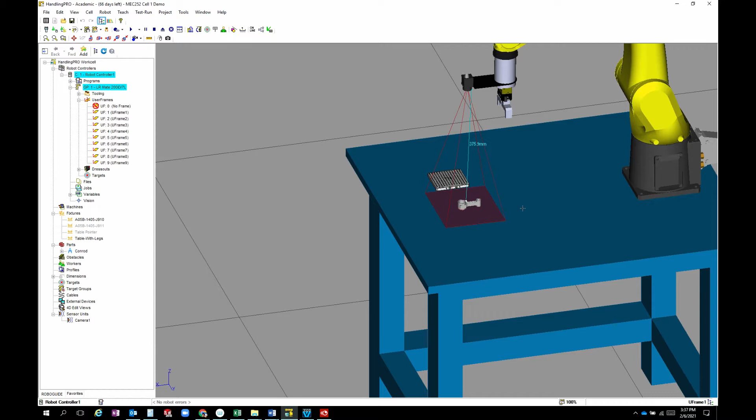As we move our robot, this field of view is also going to move because our camera is connected to the robot, so our camera moves with it. To be able to center this part inside our field of view, we have to move our robot, and thereby our camera and field of view, into a position where it is centered over our Conrod part sitting here on the table.

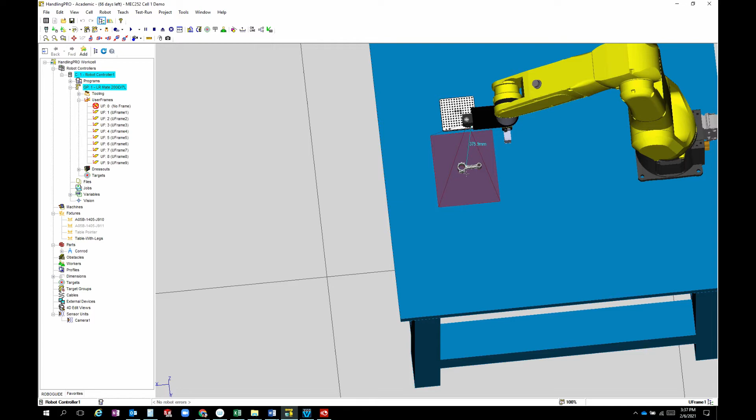We want to do this so that every time we're trying to do a vision application with this particular setup, we would always be able to go to that same position with the robot and camera. This becomes critical when we're trying to locate or inspect a part, that we're always going to this same position.

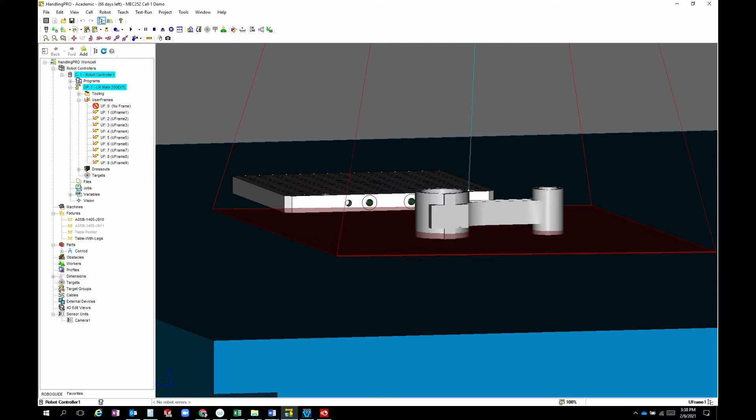From here, after that part is centered in the field of view, we make sure the robot or camera is at the correct height above the part. You can do this in a couple of different ways. One is to verify that the field of view is near the bottom of the part, which we can see with this red box intersecting the part near the bottom. This is one advantage HandlingPRO has, where we can see that relatively easily, but in the real world we wouldn't have that ability.

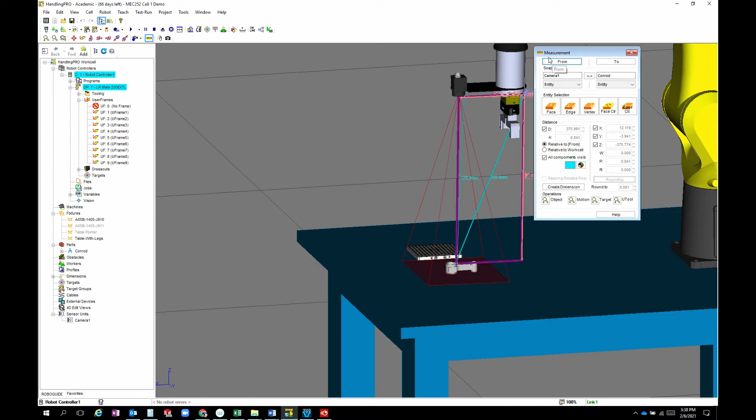So what I'd like you to do is measure that. In the real world we would use a measuring tape, but here in HandlingPRO we have what's called the measuring tool, or measure tool. Using this, we have to select a point to measure from and a point to measure to. If we're measuring from a point, we make sure this box is highlighted, already shown in blue, and we can select different ways of how to capture the point we want to measure.

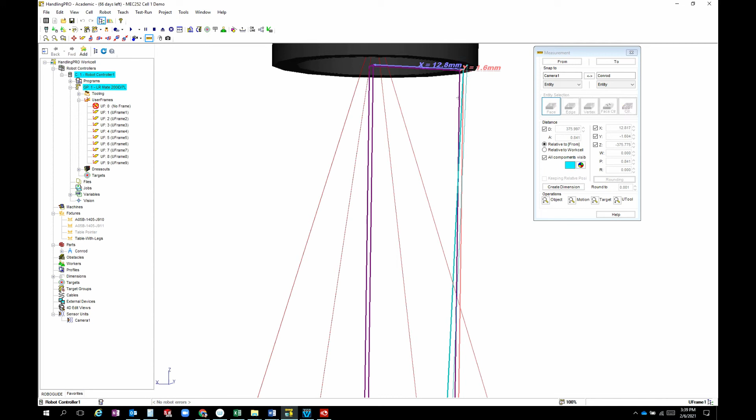So I'm going to rotate my view on the screen until I can get access to this bottom part, and make sure it'll select the face. Then I'll select a point there on my camera, and I can rotate this around to make sure it caught it and wasn't selecting something below it.

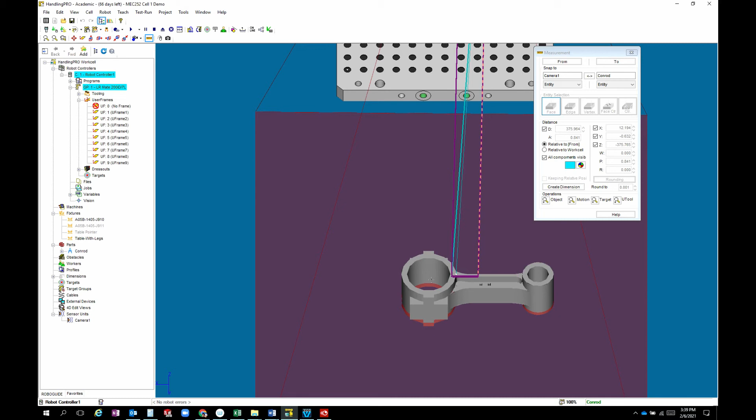Now scroll away, and rotate this around to make sure I'm over my Conrod. Then I'll hit the To, which will now allow me to select where I'm going to measure to, and it's already selected the face. It doesn't really matter where we select as long as we're on that face somewhere, and I'll show you why.

The measurement we're really interested in is this Z value. That's the distance perpendicular to both of those faces, between the bottom of the camera and the top of the Conrod part. So the Z value tells us the height of the camera from the face of this Conrod.

In the lab, I think I said 376 millimeters is our target, and I'm at 375.8, so I could play around with that a little bit to try to get it a bit better, but it's going to be close enough for what we're doing.

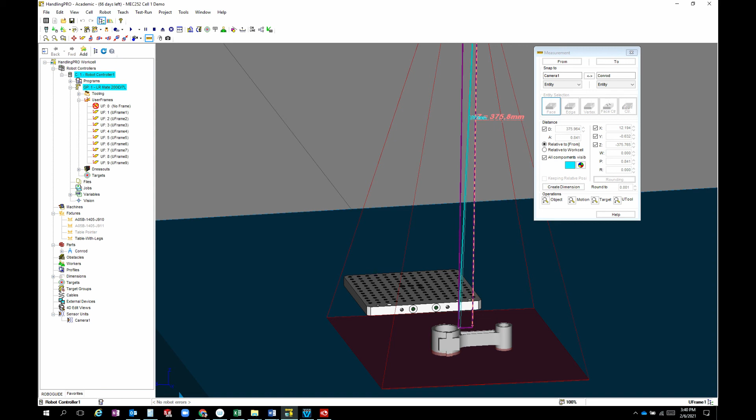Once I've done that, I can go ahead and exit out of that. Now that my robot is positioned where I want it, I can go ahead and create my camera position program, teach that point with the appropriate user frame and tool frame, and then I'm good to go.